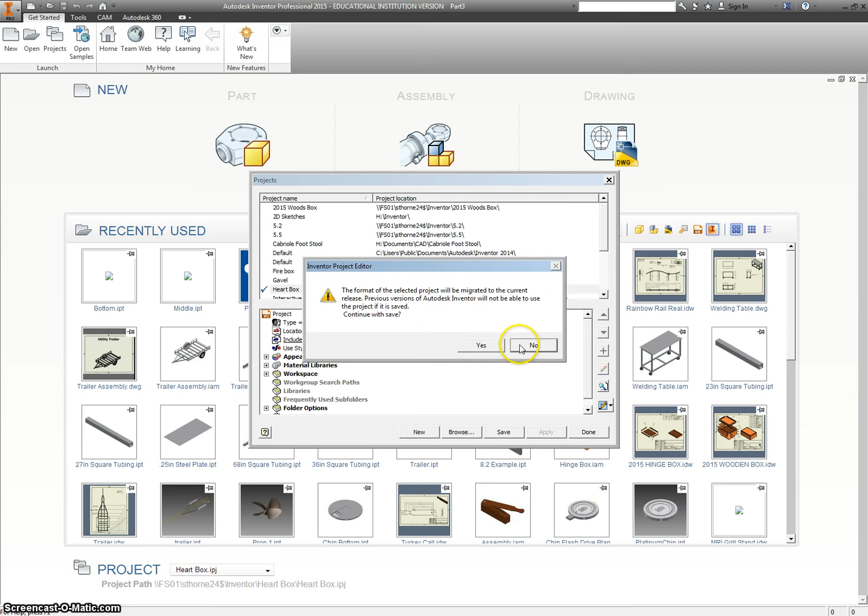Anytime we go to save our part, assembly, drawing, anything, it will go into that folder. Let's start our 2D sketch. We're actually going to pick the top plane here. And I'm going to rotate this so my top is aligned the way it's supposed to be. Right click, I can pick my 2-point rectangle.

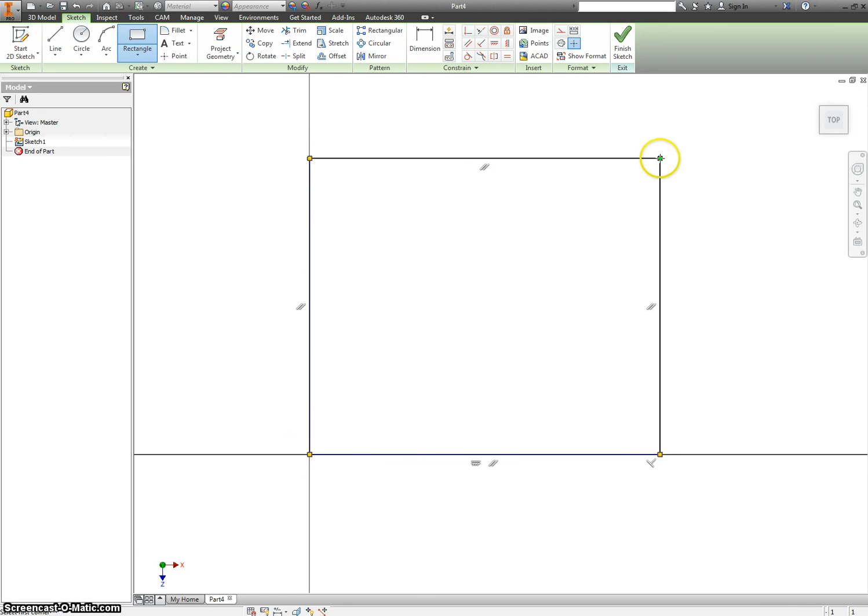This is going to be a little bit different than what we do in the wood shop. We're actually going to make these sides both 6 inches, which is how big the heart is. If you want the pattern for the heart, this is what to do. We actually use 1x8 boards and 2x8 boards, so the actual width is 7.5, but that's okay.

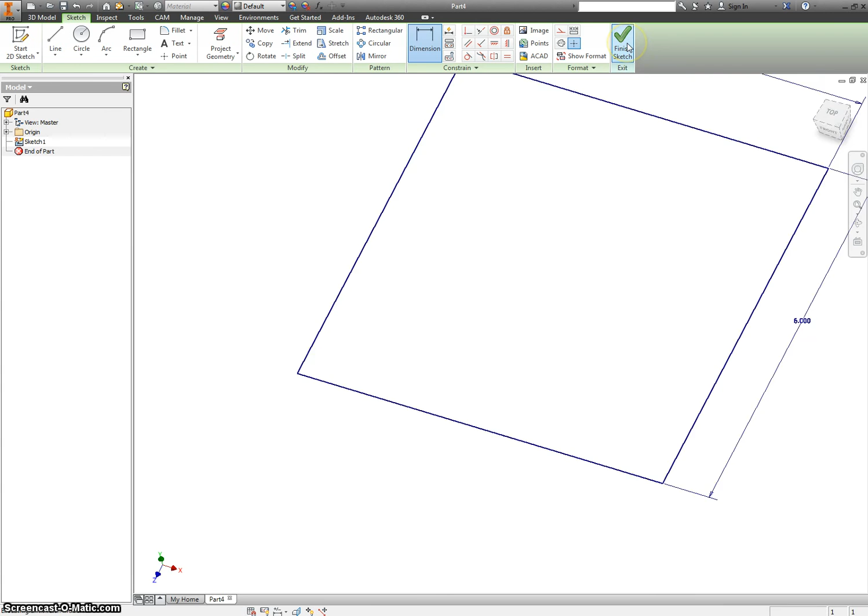Let's finish this off real quick, and we're going to extrude this. E is the shortcut key, by the way. You can click this button or just type E on your keyboard. I like using shortcut keys because it's faster. And this would actually be 1/2 inch thick, but we're going to make it 0.375. We're going to use the planer in the wood shop to get it down to a thickness that looks better when we have the finished product.

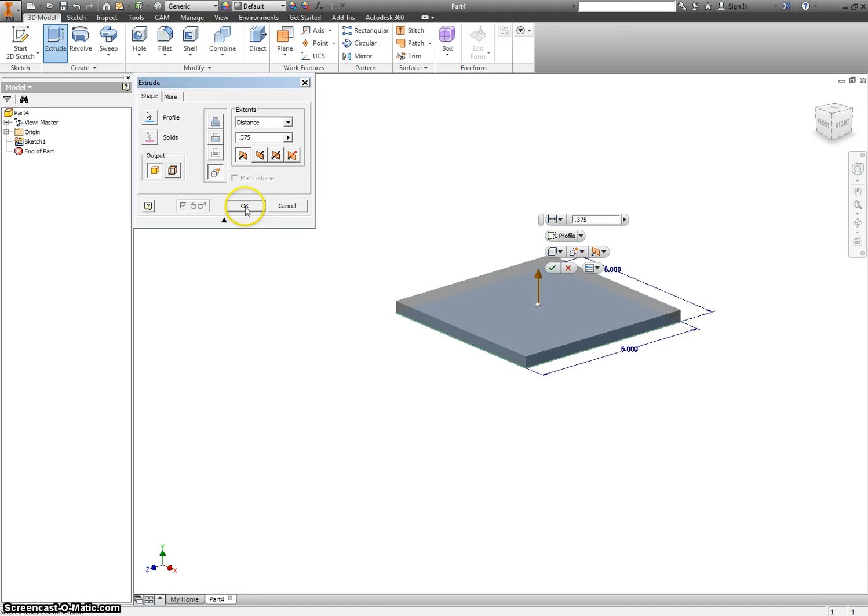Okay, now that we have the square, we're going to make a new sketch on top. And we're going to sketch out the heart. Before I make the heart, let's go to project the geometry of this face. And by doing that, these lines turn yellow. Now I can use them as a reference. So I'm going to make a couple of circles on here. I want them to be the same size, so I click equal, circle 1, circle 2.

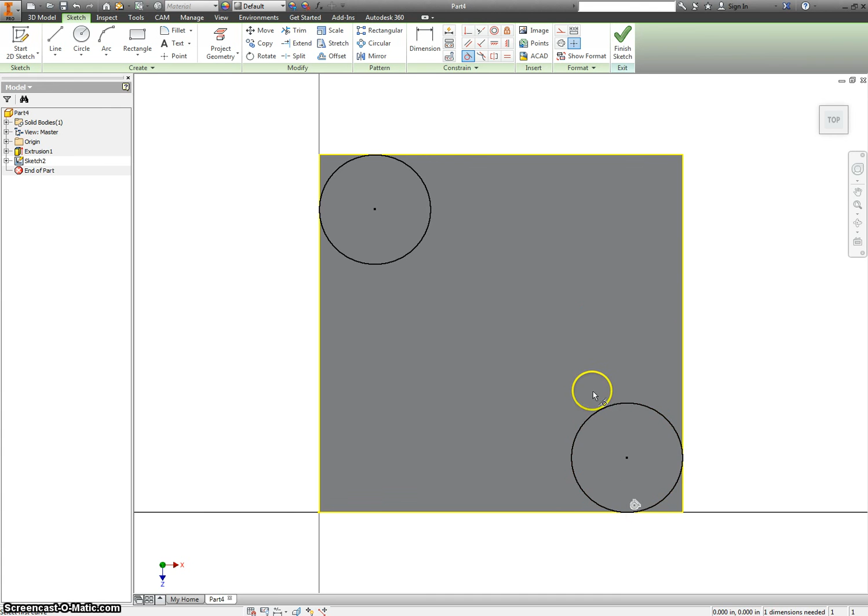And then I'm going to have them tangent to the wall on either side, tangent to this side and this side, and tangent to each other. That should center them up. I'm also going to make another circle right here in the middle, and I'm going to dimension that. D is the shortcut for dimension. If you don't want to click up here, on your keyboard, D.

Make this 0.125. Okay, this is going to give you just a little bit of wiggle room to cut this on the bandsaw. And I'm making it tangent to both circle 1 and circle 2. Okay, then I'm going to come up here and click line. I'm going to draw a line to this corner, from that corner all the way down to this point, and from this corner back to this point.

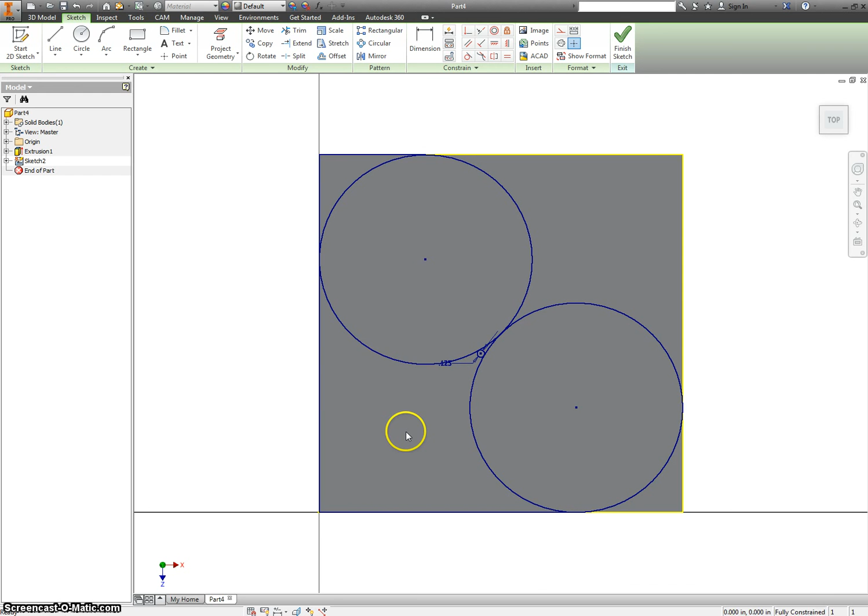I'm going to switch to my trim tool. So I was on line, so I right clicked and I said OK, and I right clicked again and said trim. I'm just going to get rid of the stuff that I know I don't need, which is a lot of it. I'm going to keep this part. Okay, and I'm going to finish my sketch.

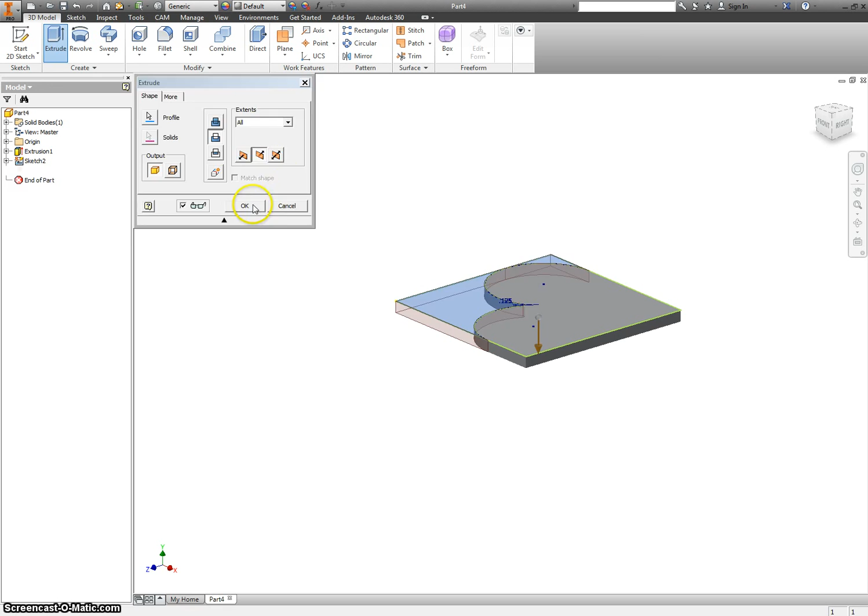E is extrude, or we can just come up to extrude. And I am going to cut through this, but instead of 0.375, I'm going to change this to all. So no matter what thickness it is, it'll still cut through it. And you'll see why that's important in a bit. You'll also see it didn't cut off this little corner here. So let's look back at that sketch. I guess I didn't tell it to.

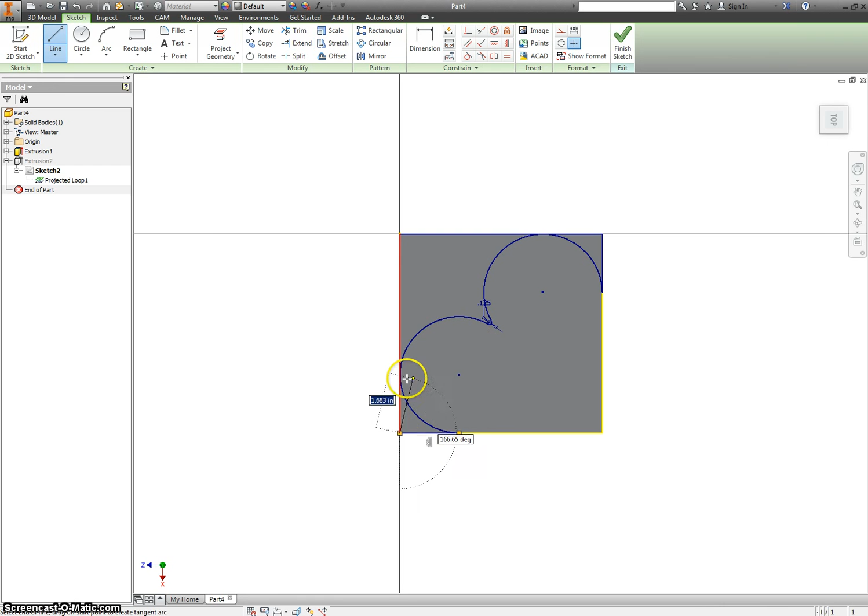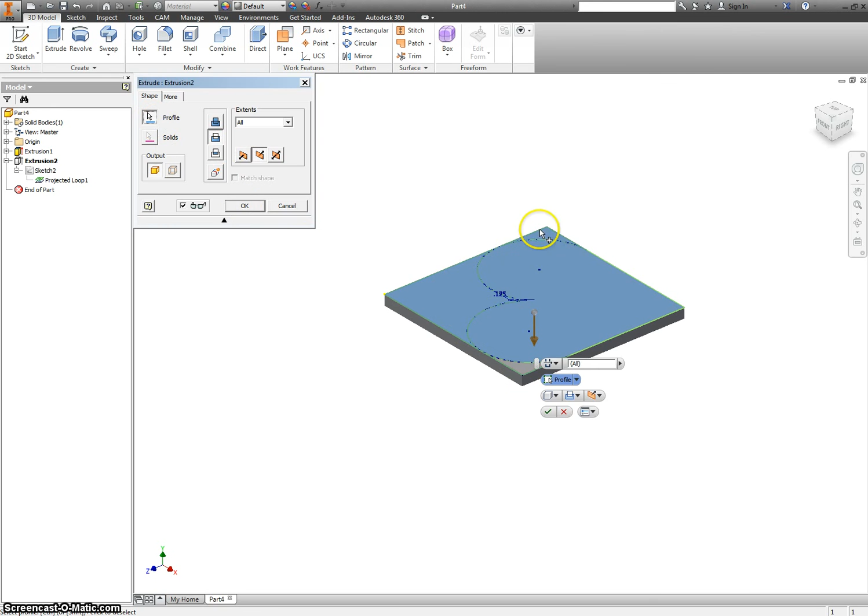So I don't see anywhere on this sketch where that continues over. So this might be where I can use my extend tool and have that come all the way down here and add in a line from that point to there and there to there. And now let's go back and finish the sketch. Still doesn't look right, but now when I double click on extrusion 2, it should bring up some options for me. And it looks like it is confused. That's okay.

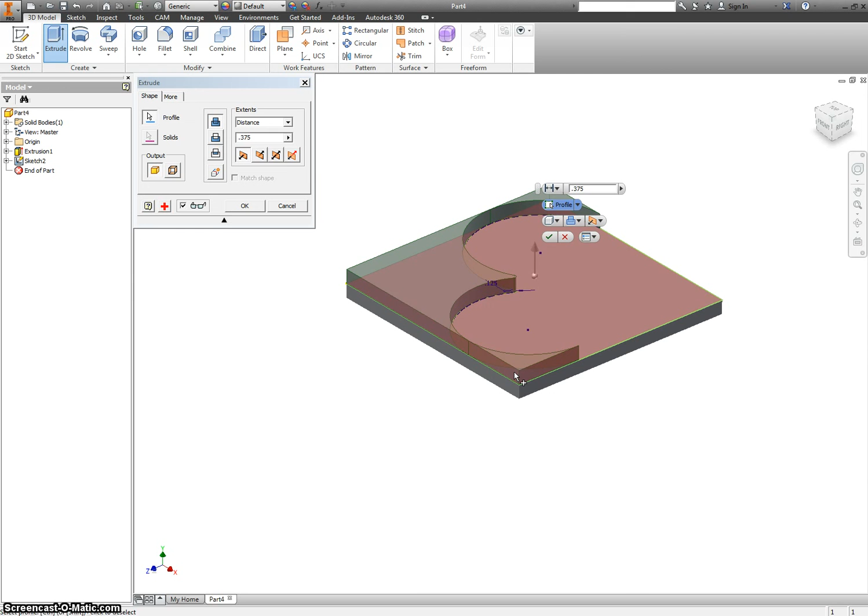Tell you what, we're going to delete extrusion 2, but not the sketches that go with it, and then try and extrude it again. So we can get rid of that part, and, could have sworn I just had it, that part. And sometimes it takes a little fiddling around with it.

It's important for you guys to see that this program can be finicky, but there are ways around it. There's ways to go back into your extrusions, back into your sketches, and fix things along the way. We're going to change this to all, so we can modify the thickness later. And we're going to save this as bottom and be done with this video.